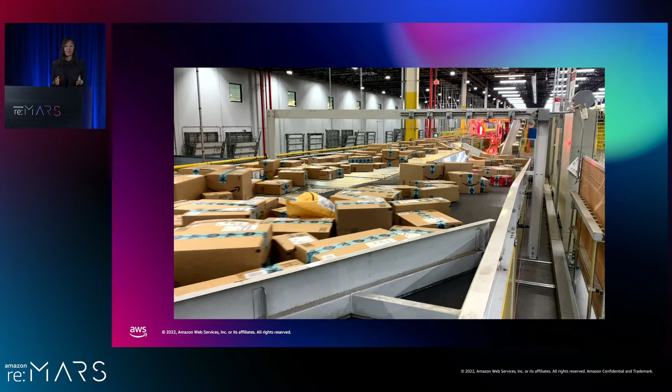Now let's compare that to the amount of work performed inside an Amazon fulfillment center. We definitely move a lot of goods, as you can see here. During peak, a typical Amazon Robotics sortable facility conveys about 500 tons of goods per day. This is only 5% of what that freight train carries at once.

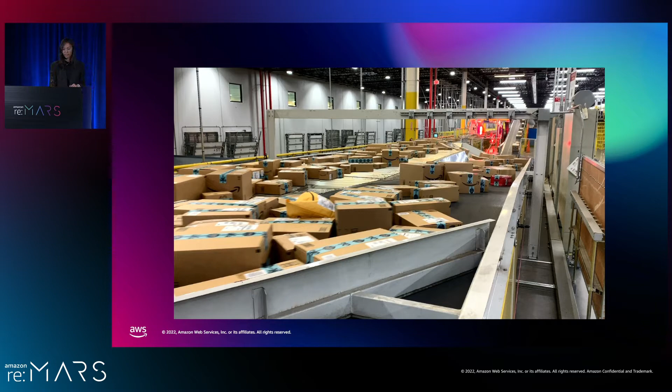So why is it that the total power of electric motors in a fulfillment center is equal to the power of that train? This is one of the main questions that I will be addressing in this session.

In this talk, I will show the implications of this large discrepancy to the entire building's power distribution infrastructure. Finally, I will discuss technology solutions that will solve this discrepancy and enable Amazon to get closer to achieving our net zero carbon pledge by 2040.

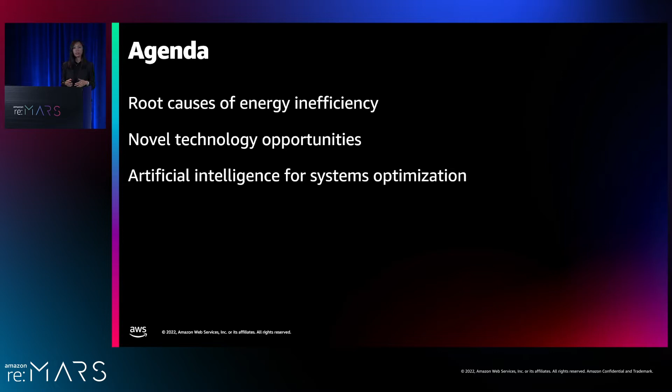Now, automation in the Amazon context consists of traditional material handling equipment, structured fields for drive units, robotic arms, matrix sortation architectures, and autonomous vehicles.

So let's first talk about traditional material handling equipment, such as conveyors, which are transporting the majority of goods across our fulfillment network. The basic building blocks of the conveyor consist of pulleys, known since ancient Egyptian times, gears whose earliest use dated back to 400 BC in China, the electric motor, which has been around for almost 2 centuries, and the conveyor, which is more than a century old.

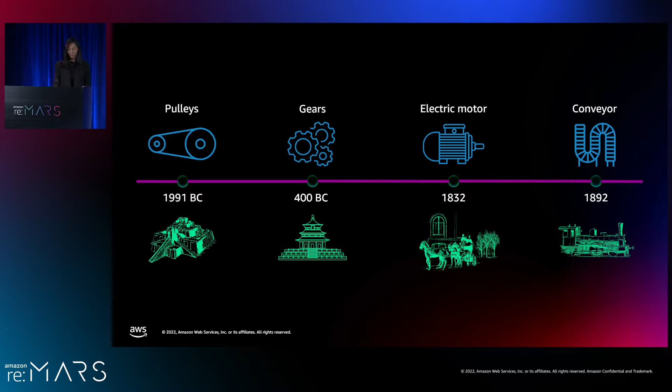So why are facilities as modern as Amazon robotic sortable sites still populated with this technology? What do we call this technology if not modern? I would call it proven.

It is so proven that even today, this technology is still conveying the majority of goods across our global fulfillment network. So why don't we just keep going, right?

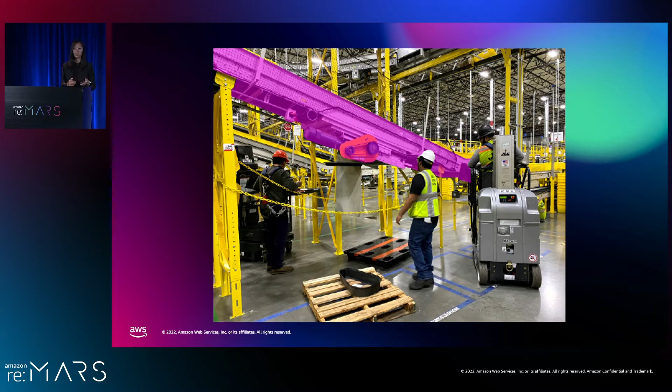Because this technology has reached its theoretical limit in efficiency and is no longer able to meet the needs of our modern times. At Amazon, we've pledged to reach net zero carbon by 2040. This will require innovative solutions with contributions across many sectors of Amazon.

So now let's decompose the typical Amazon conveyor drivetrain into its components to understand why the proven technology is not compatible with our net zero carbon goals.

Each element of the powertrain is not 100% efficient to begin with. For example, the electronic driver, also known as VFD, is at best 89% efficient. The existing induction motor efficiency has reached a theoretical limit of 87%. The worm gears that adjust the torque and speed ratio are at best 76% efficient. And finally, pulleys are at best 94% efficient.

So now if we multiply the efficiency of each component together, we get at best a system efficiency of only 55%.

Now let's dive deeper and examine the efficiency characteristics of the components as a function of load. Our systems are designed to handle peak loads, and for us at Amazon, that's the month of December.

A key concept to note is that efficiency varies as a function of load for each component of the drivetrain. So for the majority of the year, which we call off-peak, our conveyors are only handling loads ranging from 10 to 30% of the peak load, shown here in the gray zone.

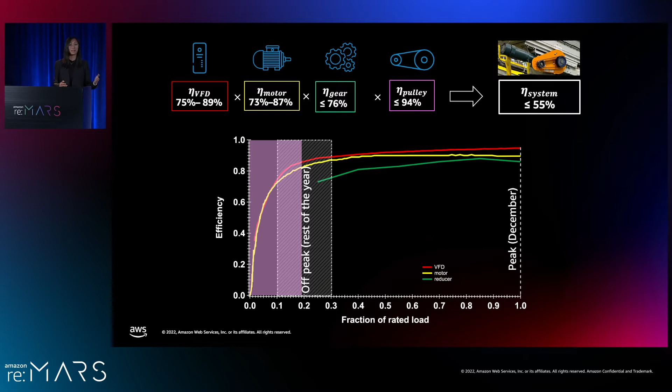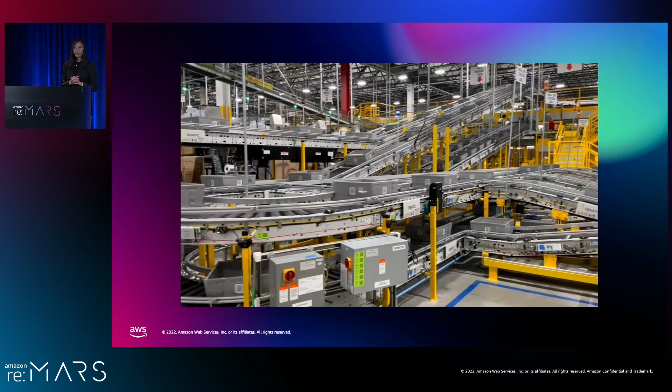So now let's take a tour inside an Amazon robotics sortable facility where we collected data on the power consumption of every single motor drive on every conveyor through peak, which is the month of December. This is the first comprehensive study of power consumption by automation equipment inside an Amazon facility.

Quantitatively, however, there are key differences. During peak, the daily outbound weight on average increased from off-peak by 51%, whereas energy consumption increased by only 5.1%.

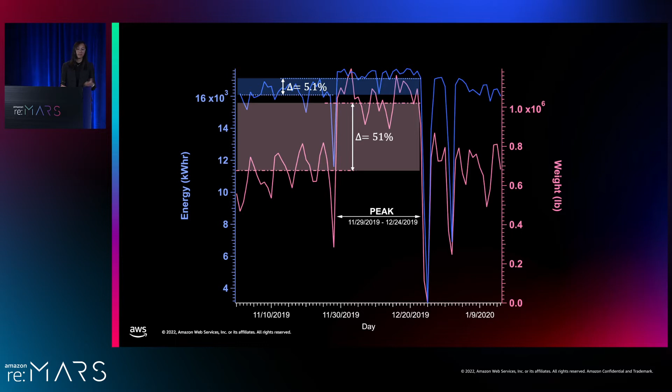So what does this tell us? First, the majority of the energy is spent moving relatively empty conveyors. Second, the drives that populate our warehouses are too large for the loads that they convey. Tying this back to the key characteristics of electromechanical systems losses discussed earlier, oversizing is just really bad from a system efficiency standpoint. This data set confirms that oversizing is a systemic issue across the entire fulfillment center.

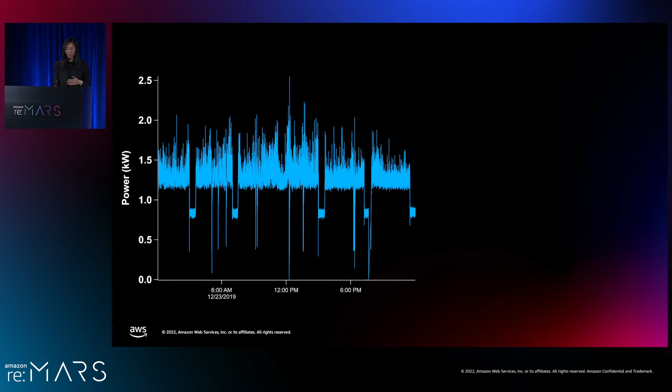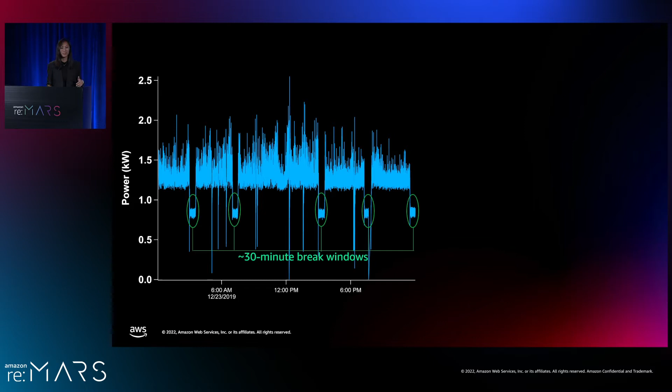Now let's dive deeper and take a look at the energy consumption of an individual conveyor drivetrain, sampled once every 3 seconds, shown here in the blue trace. This data enables us to glean a wealth of information about conveyor operation, such as these 30-minute windows when associates go on break and conveyors are running empty. There's really no reason for conveyors to run empty - they really should be shut off instead of wasting energy.

So let's zoom in further on one of these transition spots between break and operation. Here's where the conveyor is running empty, and here is where there's a loaded conveyor. As you can see, the power depends on how many boxes are on the conveyor at any given moment. This is the fluctuation in power demand based on load.

So there are two key messages that we can take away from here. The first is that the majority of the power, which is 0.84 kilowatts, or roughly 2/3, is spent moving empty conveyor, while only 1/3 is spent moving goods.

Second, the drives to perform this job are highly oversized. This conveyor is driven by a motor that is rated to produce 7.5 kilowatts of mechanical output power. But even at its peak, it consumes less than 2.5 kilowatts of electrical power. So if we account for efficiency in converting electrical to mechanical power, this motor is operating only at 15% of its nominal load in that very steep drop-off zone of the efficiency versus load curve shown earlier.

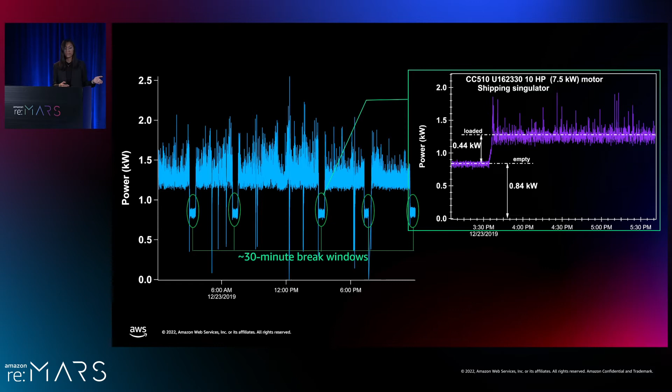So what can we do about it? Now this presents an opportunity to evaluate new technology solutions such as mechatronic drives. What is mechatronics? Mechatronics is an integrated solution of mechanical, electrical, electronics, and firmware in motion applications. Recent advances in motor, gearing, and high-power semiconductor transistor technology have led to the emergence of a new paradigm where the performance of an integrated solution is better than the sum of its individual components.

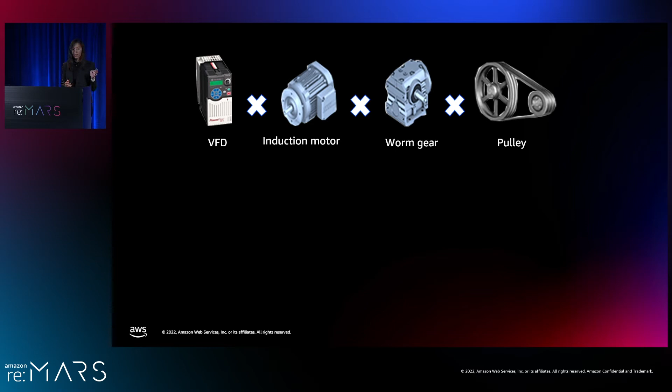So let's take a look at the benefits of this technology. In mechatronics, the motor electronic driver, the VFD, is tailored and programmed to match its control parameters to the parameters of the motor. This enables much more efficient operation than what's currently achieved by universal third-party VFDs that have to work across a wide range of motors from different vendors.

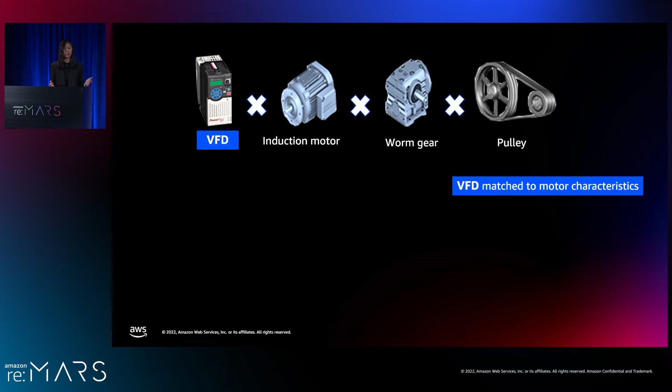And what about the motor itself? As I mentioned before, induction motor technology has reached its theoretical limit in efficiency. The development of permanent magnet motor technologies offers more than 20% reduction in losses compared to the most efficient induction motors. More importantly, the efficiency doesn't degrade much at partial loads.

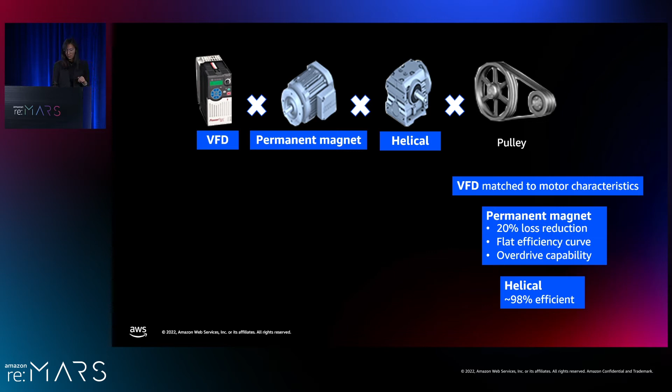Now, what about the gears? With advanced machining capabilities, the gearing industry has produced very high efficiency gears with efficiencies as high as 98%. More importantly, the efficiency doesn't drop much with load as worm gears do. And finally, using the hollow shaft configuration, they can be mounted directly on the shaft of the conveyor, eliminating the need for pulleys in the final fitting to the specific conveyor geometry.

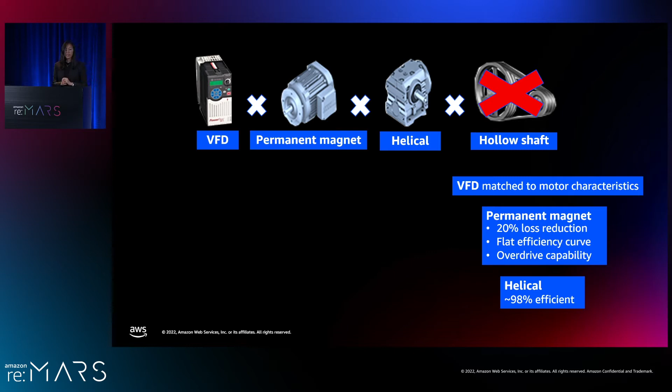So in summary, the mechatronic drive solution presents an attractive opportunity to shepherd conveyor technology into modern times.

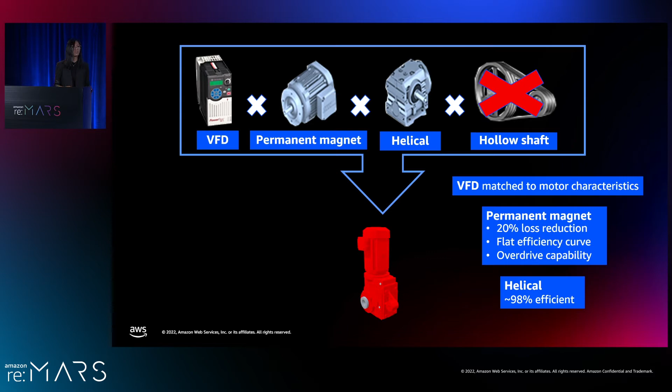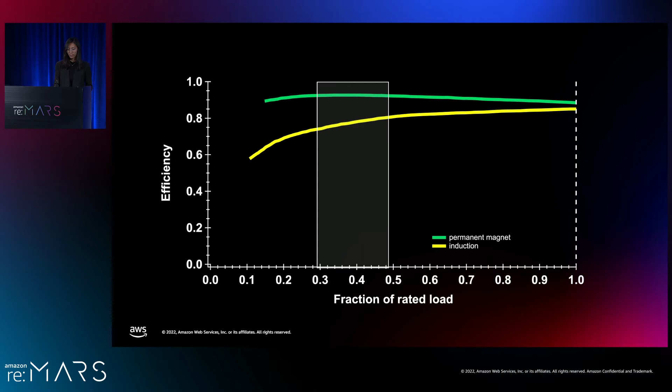Now let's do a recap of what I've covered thus far. First, the current conveyor drive technology is inefficient and oversized. Second, progress in the mechatronics field has produced a technology that can solve our problems of inefficiency and oversizing. So how do we quantify this impact?

In this work, we developed an algorithm to model energy consumption of advanced solutions using the VFD data that we collected for every single motor drive. And for the first time in the industry, we have developed a model that takes into account partial loads and efficiency of every component in the drivetrain.

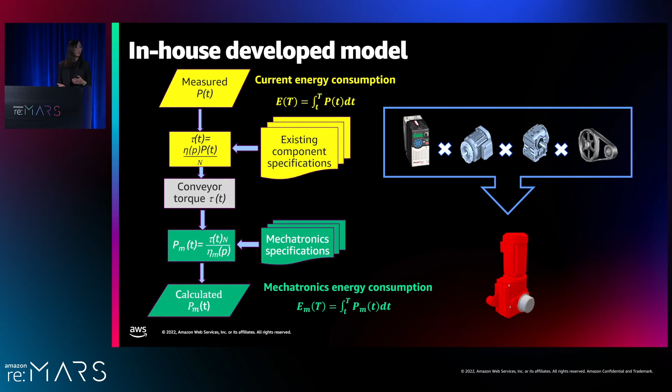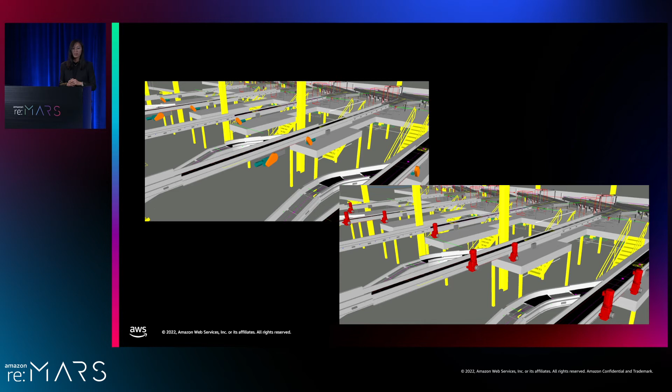Using this model, we analyzed the impact of replacing every motor drive in the facility with properly sized mechatronic drives. We found that doing so would result in 42% energy savings and carbon footprint reduction, equivalent to 820 metric tons per year of carbon footprint reduction per site. Now, this is the largest entitlement for reduction of indirect emissions within the building.

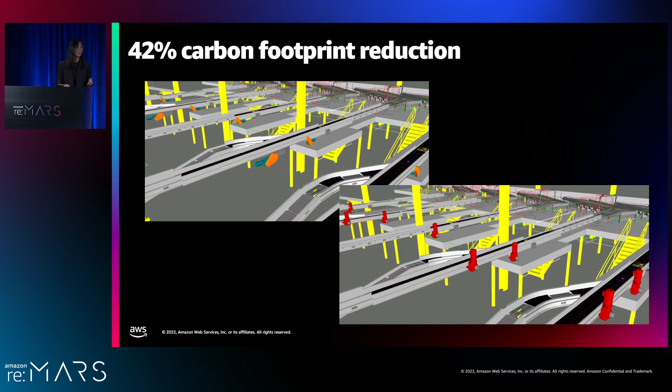Now, what about the cost of this technology? Well, it comes at a higher price, but due to the reduction in power consumption, it enables us to reduce the size of the power distribution equipment, which in fact leads to a net CapEx savings. And additionally, we'll be seeing net OpEx savings from utility bill savings.

Based on this analysis, we have launched several pilots in Europe and in North America, with initial results confirming energy savings as predicted by the model. In Q2 of this year, Amazon in Europe has mandated that all new builds be equipped with mechatronic drives. In North America, we're working with machine vendors and design partners to build this into standards moving forward.

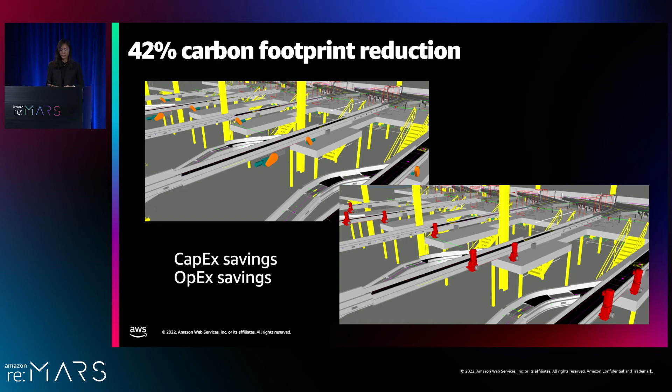Okay, so now I'm going to switch gears away from traditional conveyors to discuss other opportunities for achieving net zero carbon in the automation realm.

This here is the Amazon item singulation machine. It's an advanced technology system that takes a tote filled with items and singulates them. When we were preparing for deployment of this machine to Amazon buildings for the first time, there was a concern that additional electrical service would need to be added to the buildings to meet these new demands. So in doing a deep dive into the electrical ratings of this machine, we actually realized that the nameplate rating...

...which was 60 amps, was significantly larger than the actual machine demand. This is actually due to the common practice of machine integrators to add up all the power-consuming elements of the system, assuming simultaneous maximum current draw. Now, in reality, the probability of this event occurring is next to zero. The machines and systems inside our facilities operate according to flow logic, with motion profiles that don't follow the model of simultaneous maximum current draw.

So what do we do? We modeled the flow of goods through this machine and performed measurements to verify the model. The machine originally, as I said, had a nameplate rating of 60 amps. And as you can see here, it consumed in total no more than 3.5 amps, which is a factor of almost 20 times discrepancy between nameplate rating and actual demand.

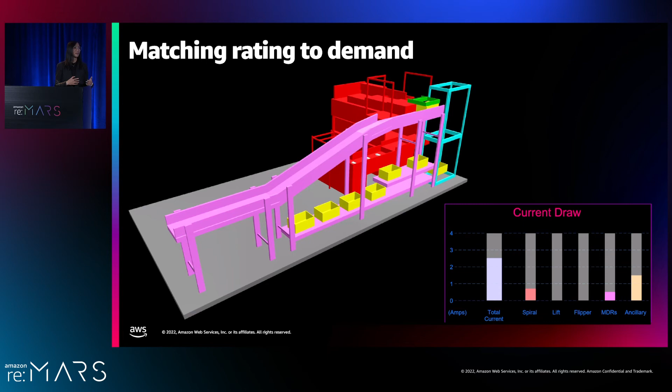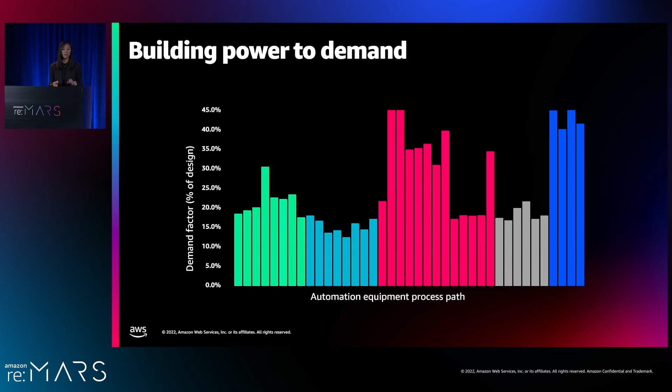We also performed the first comprehensive measurement of all automation equipment inside our facilities, not just conveyors. Measuring demand through peak, we found maximum utilization of design capacity of 45% by any given automation equipment. For the full building, there is an average oversizing by a factor of 5x. This data shows there are clear opportunities to ensure proper rating and sizing of automation equipment across the board.

Now, in robotics, we are continuing to innovate and develop new automation architectures to keep up with demands of our growing customer base and shorter delivery times. Therefore, the composition of automation equipment is expected to change. The sortation that has been performed by traditional conveyors may shift towards more advanced and integrated robotics solutions.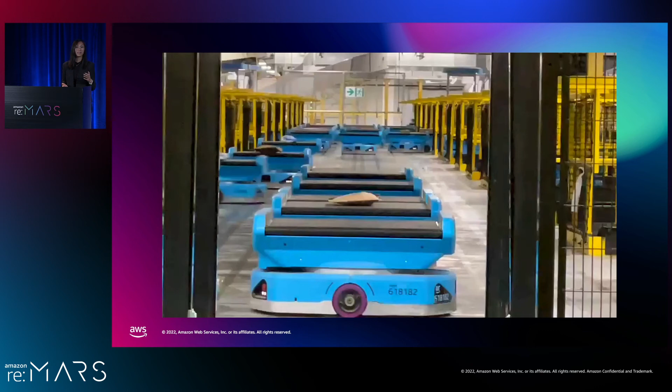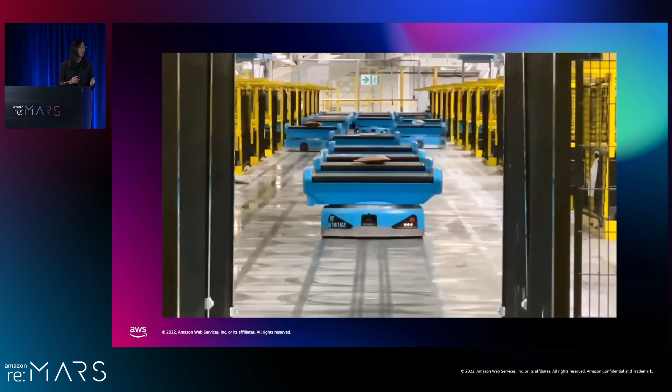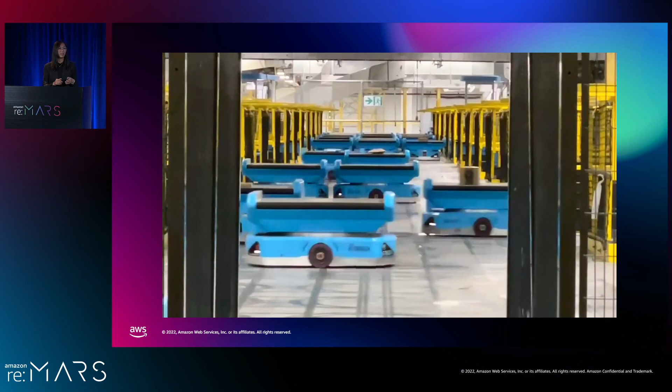So we're performing energy studies at the systems level, introducing energy efficiency as a key performance indicator for evaluating system design and trade-offs. Shown here is a new robotic sortation solution with sortation performed by a fleet of drive units, or robots, that we call Pegasus. An area of opportunity here is to leverage artificial intelligence to perform path planning and traffic routing for optimization of power consumption.

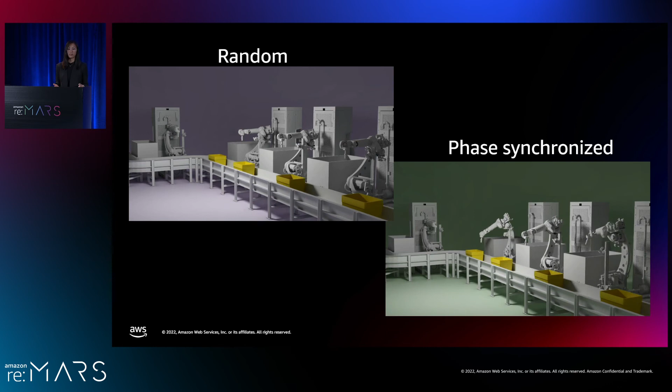Another area of opportunity for optimization of power consumption is to study the time dynamics of robotic systems. When you have tens or hundreds of robots that operate independently in the facility, there is a probability of all arms demanding maximum power at once, as shown on the left animation. Therefore, in this scenario, the building's power distribution infrastructure should be designed to accommodate this maximum power demand.

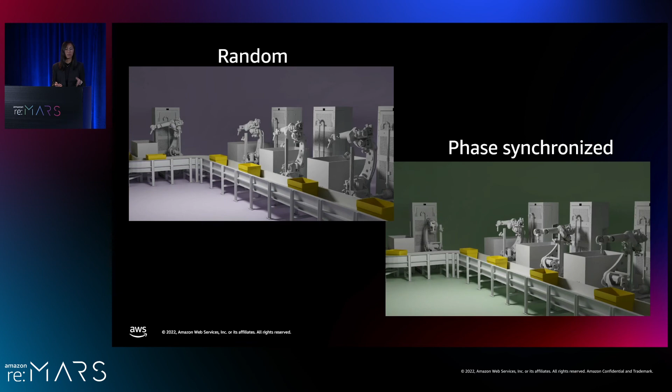However, we can envision that using AI, we can control the motion of the robotic fleet by phase synchronization to avoid the overlap of their maximum power draw. This will lead to the immediate benefit of a downsized electrical capacity requirement, and it will also enable optimization of power consumption along with other key performance indicators such as throughput.

Okay, so just to recap, we discussed opportunities in the automation realm, from new motor technology to AI for optimization of robotic systems. This has implications for the rest of the building.

First, making automation more efficient means we're dissipating less heat, so our air conditioning systems will work less. The transformers will be smaller, and for existing buildings that are oversized, reduction of current draw in existing infrastructure will result in lower resistive losses, which leads to an overall net benefit in power consumption. So it means we'll be drawing less from the power grid. And here, I would like to focus your attention on the grid.

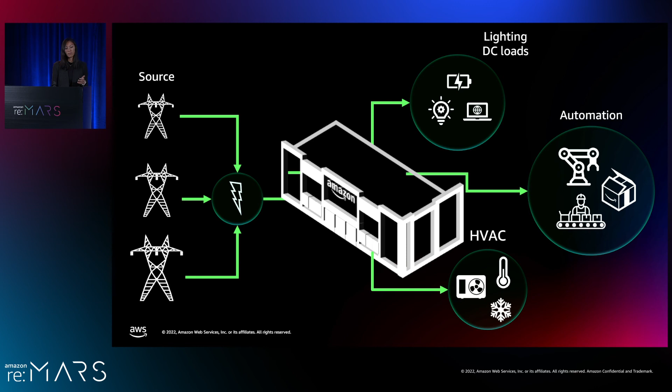So currently, we are using AC power supply. However, the consumers of electrical power in the building are intrinsically DC, so this means that there's a conversion involved in the scheme. At the same time, we're adding alternative energy sources to our buildings, such as solar, which is intrinsically DC, but we're converting to AC and then feeding this back into the grid. Now, this AC to DC conversion stage is adding losses, and they appear unnecessary from an energy efficiency standpoint.

So let's look at how we can benefit from going directly to DC distribution within the building. Now, DC has several advantages over AC. First, the current carrying capacity of the same gauge wires is higher for DC. Second, there are no power factor losses. And third, there are no rectification stages, so we don't need transformers. And these advantages are estimated to provide 8 to 10% across the board energy savings.

Moreover, the DC power distribution approach is synergistic with the rapidly expanding electrical vehicle and other DC charging infrastructure that we're building.

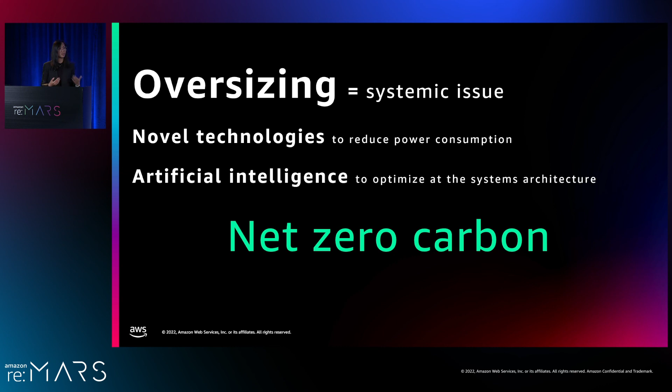So I believe the future is bright. We have large levers to reach net zero carbon, so we don't need a large freight train engine to convey the goods in our building. Thank you.